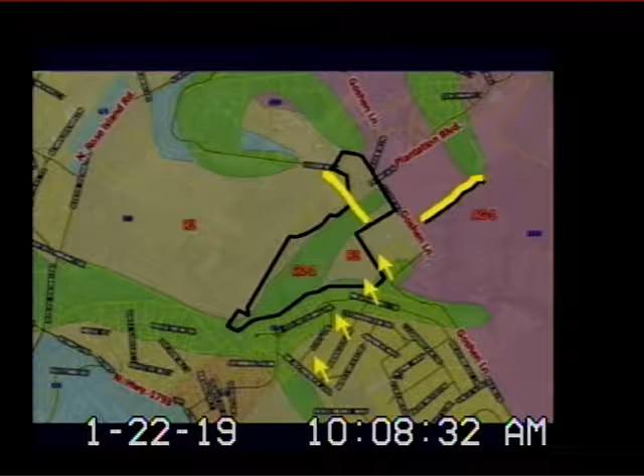This gives a closer view showing where the zoning is, the CO1 and the R2. If you touch the lower right corner it erases the arrows we put on — thank you, that's not exactly my skill set.

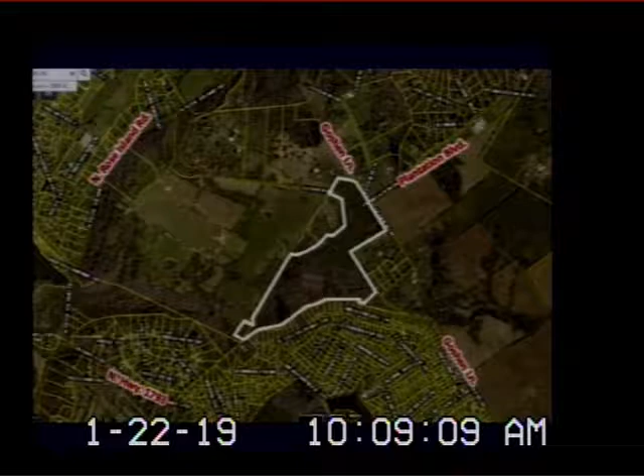This shows the aerial of our site. As you can see, a lot of the people who will complain about us removing trees ignore that we're retaining over 50% — 57% will be protected in this plan as the open space subdivision. Notice everyone around it has had their trees removed almost entirely. We're preserving more trees than anyone in the immediate vicinity, and more than anyone you'll see in opposition today.

This is an aerial with our plan on top, alongside the original plan we showed at our first neighborhood meeting. The change in the second plan is subtle — you'll see an open space area in the middle, with basically two cul-de-sacs in the original plan. In the new plan, there's an additional cul-de-sac, with the open space area and common grounds in the center moved a bit further into the neighborhood.

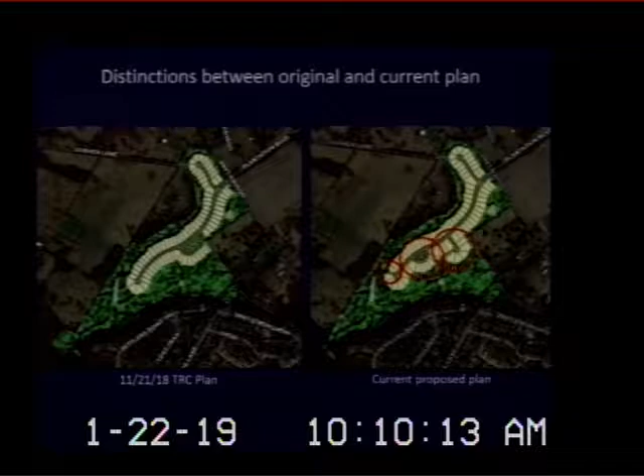This shows the two plans side by side with the areas of difference circled. The changes didn't alter the substance of the neighborhood much; they allowed us to give more buffering to the neighbors immediately adjacent to us. At the neighborhood meetings, many of those neighbors wanted more buffers, and we listened. We're required to provide buffers, but we've provided very good ones, and I'll give details as I go through the presentation. That was the reason for the layout change.

Now, the open space subdivision — these are the objectives laid out in your code, which provides a design alternative to conventional subdivisions. It's meant to provide flexibility in developing areas with environmental constraints, scenic vistas, passive recreational resources, and valuable agricultural resources. This site has environmental features we want to preserve — slopes, and areas with streams or ephemeral streams — and we're keeping those in protected areas.

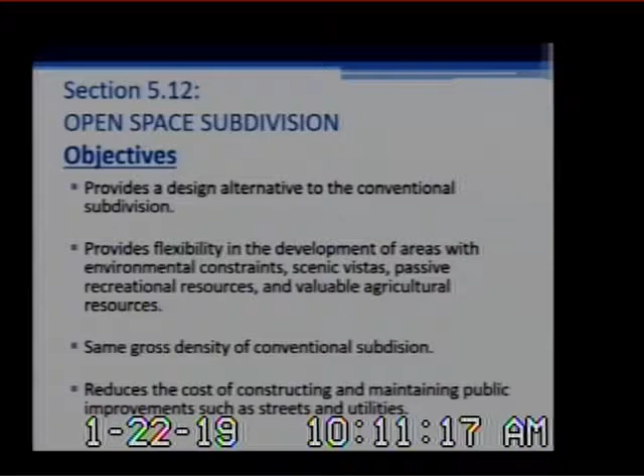It has to maintain the same gross density as a conventional subdivision — you heard Ms. Alvey confirm we meet that. It also reduces the cost of constructing and maintaining public improvements like streets and utilities. By having lots closer together, you need less infrastructure — fewer pipes, less disturbance to the ground — so you can preserve more. That's the intent of the open space subdivision. Now, these are the design principles, also found in your regulations.

It's to reduce individual lot size. So how do you reduce them? You've got to preserve at least 50%, and with what land you have left, you can make the size of the lots. But can you make them any size you want? No, you cannot. Your regs are very specific, because despite the fact that we can reduce the size, we still have setback standards, front yard and backyard standards, so there's a limit to how small we can get. All the lots on the CO1 comply with all of the standards set for CO1. All the lots in R2 comply with all of the setback and yard requirements for R2. That's how you get the size of your lots.

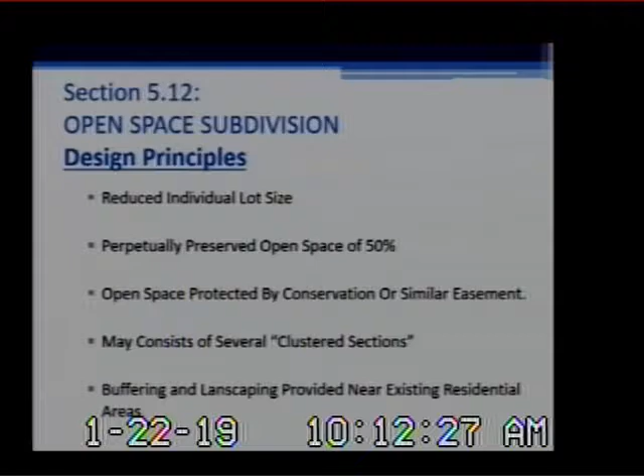The open space is protected by conservation or similar easement. That'll be on our plan. It may consist of several clustered sections - we have four sections of this neighborhood. The buffering and landscaping provided, I mentioned that briefly, and I'll give a little more detail as we go through that.

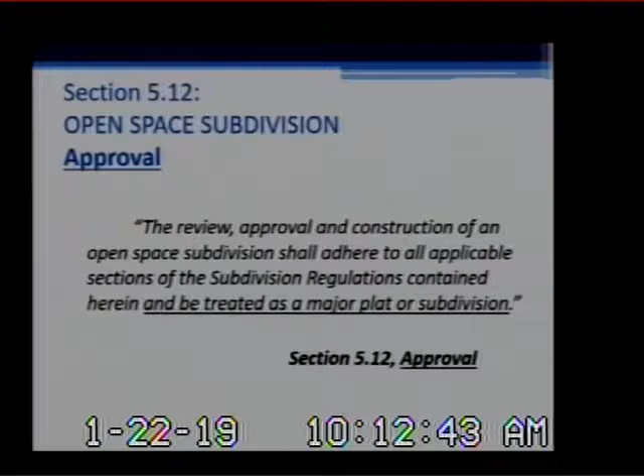For the approval of an open space, it's clear that the subdivision approval is exactly the same as it is for a normal subdivision - no different, standards are the same. We are still looking at a ministerial decision, not a discretionary one. The legal test is the case Snyder versus Owensboro - I won't read that, I think most of you are familiar with it. But this case is very clear that standards have to be set, and we meet those standards. If we do, we get approved. That is what the law says for a preliminary subdivision plan.

Now let's get into the nuts and bolts of our plan. Total acres, I already mentioned, is 78.83 acres. The CO1 acres consist of 38.83 and the R2 is 40, roughly 50-50 on both of those.

The developed coverage is the part that we will develop with roads and lots. Mind you, even with these lots, we are not cutting down every tree on every lot - they are not going to be clear cut. The backs of most of the lots, particularly those close to adjacent property owners, those trees will be preserved. The question was fair - could an owner cut those down? Yeah, they could. Will they likely cut them down? Probably not. It would be very expensive, and most of the time those neighbors want to have a buffer just as much as the people that currently live there now.

The open space acreage is 45 acres. One of the things I've read in many of the criticizing letters is on the environmental side, and there's a lot of things that are subjective in terms of design - beauty's in the eye of the beholder. But in terms of environmental, even though it's not required beyond protecting the open space, we go way over and above what's required to protect the sensitive features on this property, and we protect them well. The open space requirement was 39, we're going 45, significantly over that, and that comes directly from your regulations, Section 5.12A, Design Principle.

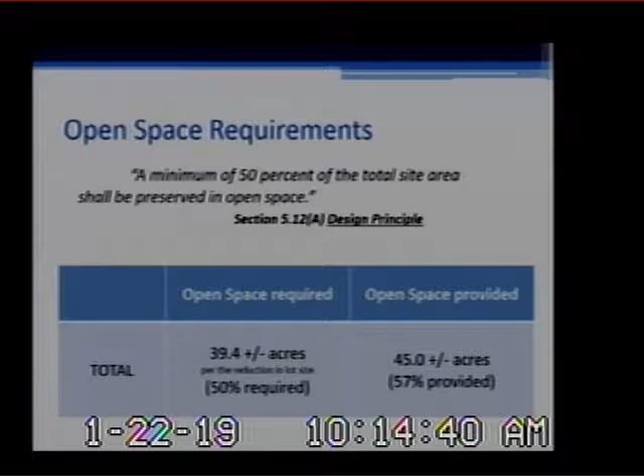The same maximum density is allowed in a conventional subdivision - this is what your regs say. An open space subdivision has the same gross density of a conventional subdivision, Section 5.12 objectives. Now, there was a question, I believe from Commissioner Douglas, asking whether we provided a lot yield plan. We had not, because we didn't think it was necessary - we believe we comply under the gross density. You'll have two ways to calculate density.

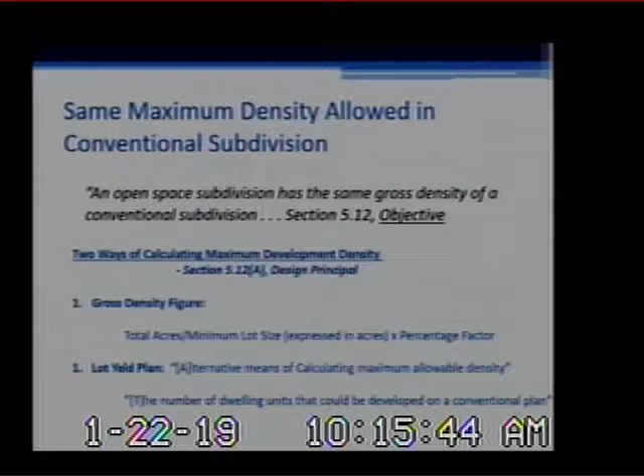One is the gross density figure, and the other is the lot yield plan. In this presentation we'll provide both and give you the numbers for both. We comply with both, but let me back up on the lot yield plan. The gross density is just a mathematical calculation - take 60% of what you could possibly feasibly fit in. Let me explain that: once you put in roads, usually your density isn't quite as high because of the roads. This allows you to pretend there are no roads, so you could go maximum. The lot yield plan actually requires you to look and map it out - how many could you actually functionally put on the property? Under the calculations for the max lots under gross density, Amy said 110.

I think it's 112, but it's not really a substantively different number either way. Under the lot yield plan, you can go to 98 lots. How many lots are we proposing? 80. We aren't even close to touching the maximum development density for this piece of property.

Here's the lot yield plan. I won't spend much time on it, but you can see how it would be laid out. If you have any specific questions, we could bring Derek Triplett from Land Design and Development to answer them. But basically, it's in the record, and you can get 98 lots under a lot yield plan.

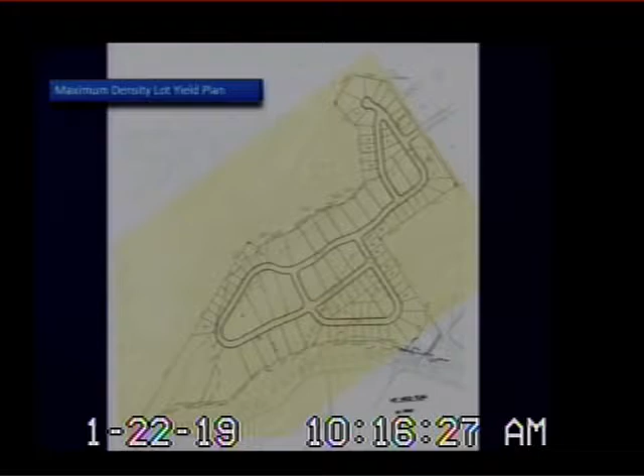Here's our development. The red lines, which hopefully you all can see, show the division of the sections. The sections are important, and we'll build generally in those types of phases, one section at a time, and that's the way the development will be brought out.

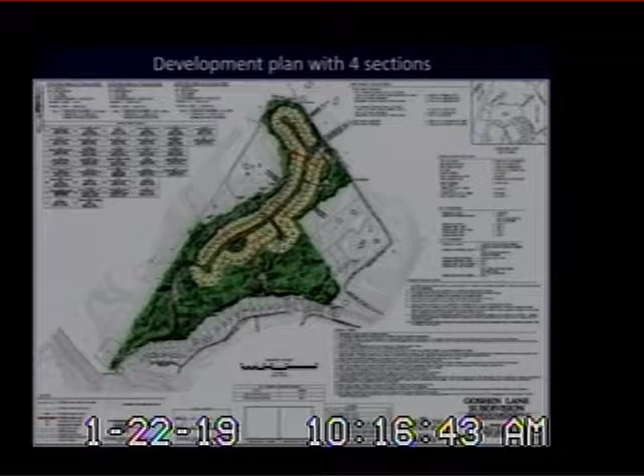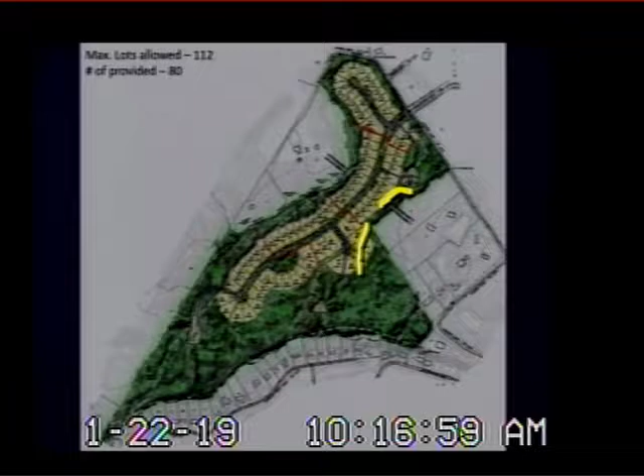This is a close-up of that. Again, I've got max lots allowed at 112. I don't have the lot yield on there, but those things both go hand in hand, and again, we're underneath both. Now, the two areas on the buffer in this area, and then obviously under road as well - that's where the buffering is going to be, and we'll get to those slides here.

This shows the property. I'm getting my north and south a little mixed up, but I think you can see on one side we provide a minimum of 30 feet - that would be to the north - and then to the southeast, if I've got my bearings correct, we've got a minimum of 40 feet. Again, that 40 feet does not include the lots - the lots will probably have an additional 20 feet of trees left on them, maybe even more, but probably at least 20. So those buffers will be greater than what's actually displayed.

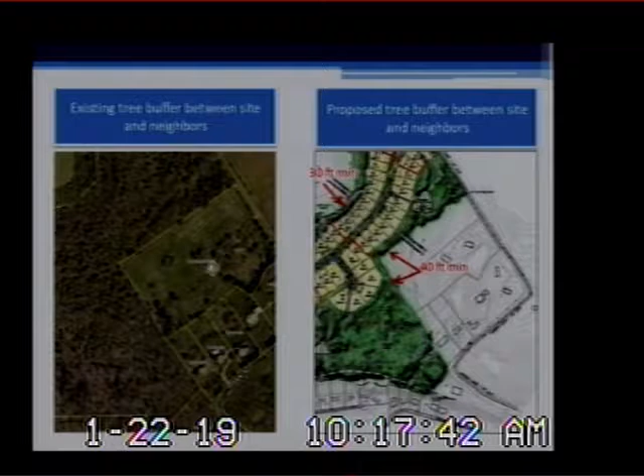The other side of it is along Goshen Lane, on the part where it wraps around. On the part that kind of looks like it has the two angled sides at the top of the screen, the minimum is 30 feet. Now, on the other side along the straight section of Goshen, it's 20 and 50. The buffer is technically 20, but with the right-of-way, the actual tree coverage will be more like 50 feet. So that's what that figure is, and we're not going to cut or clear those trees down. We are leaving those trees, so they will not be cleared.

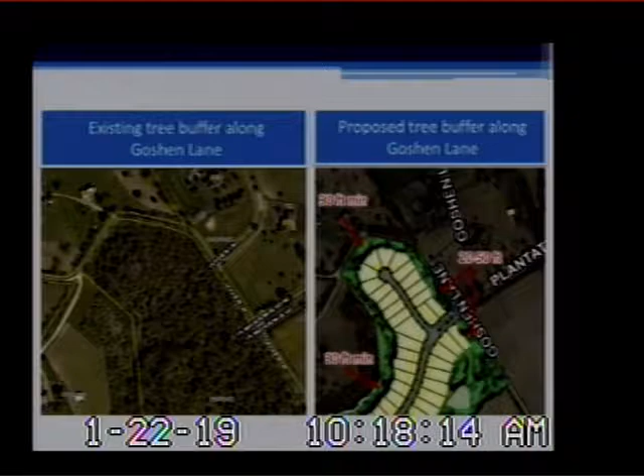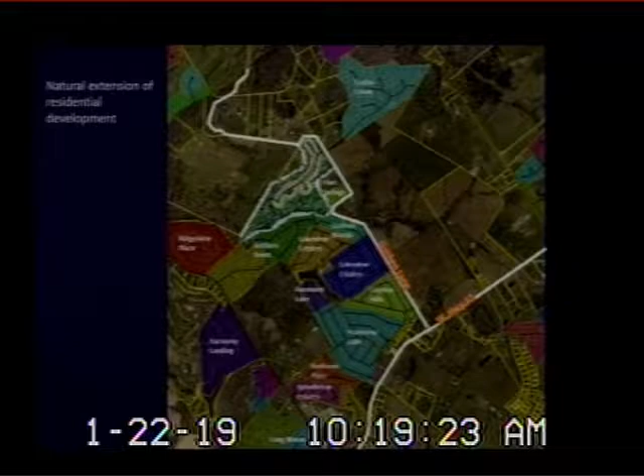Oldham County is going to have development. It's going to happen. Where do you want it to happen? Would you rather have it in a place where there's no other development, no infrastructure for that? No, of course not. This is a natural progression of this neighborhood, and this is where we put it. Taylor Creek, a little bit beyond us, honestly, if anything's out of place, Taylor Creek is out of place. It's by itself and was put in a long time ago. We are not repeating the mistake of putting a neighborhood where there's no other development - we're keeping it immediately adjacent to development that's currently there.

Another thing I saw in some of the neighborhood meetings and in the letters were comments that Goshen only has, I forget the exact number, 900 residents, and this neighborhood's going to increase it by 25%. I don't even understand some of these comments, honestly, because we're not even in the city of Goshen. You can see in red where the city of Goshen is. I don't know if people are confused or just don't understand, but we are not in the city of Goshen. Now, what I think is important, and maybe this is the point, is how many people are in this area.

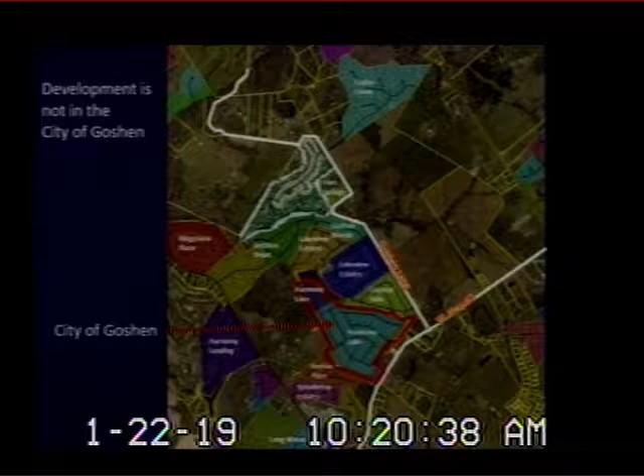If you look in that general area, there are over 1,000 lots. This is exactly where additional development belongs. And we are adding a modest number of only 80 lots. We are the only one preserving environmental areas, preserving open space for the deer, the bunny rabbits, the birds, the trees. Where we do have to clear it for some lots, time will bring trees back. People like trees and generally want them to stay. But this subdivision belongs in this area, and it's a good development for this area.

This is a comparison to Cedar Point. Commissioner McWilliams, I watched the Cedar Point hearing. Some of the same issues came up here in terms of road improvements, and I was impressed with a lot of the questions you asked at that hearing. I want to make a comparison because that's a subdivision your commission approved with a zoning change, when you had discretion, not in this type of case.

The number of lots in that development was more than ours, 25% more, 102 lots. We're at 80. Their total acreage was 32.7 acres; we're almost 80 acres. More acres, less lots. The open space, they had 6 acres. We have 45.

Price point's roughly the same. Their testimony was 300 to 500. Ours is going to be 350 to 500. It's hard to give a definitive number because it comes down to building costs, which are going to be more than a year away. In addition, we don't know what amenities people will ask for.

Road type, Commissioner McWilliams, this was the issue in that case—that Cedar Creek is a quote-unquote 'collector road.' That's a classification referred to as the functional classification from 2010. From the best I could understand, that's never been adopted by fiscal court. It was adopted by the Planning Commission, but never by fiscal court. It's also not named in the subdivision regulations, so I don't think it even applies.

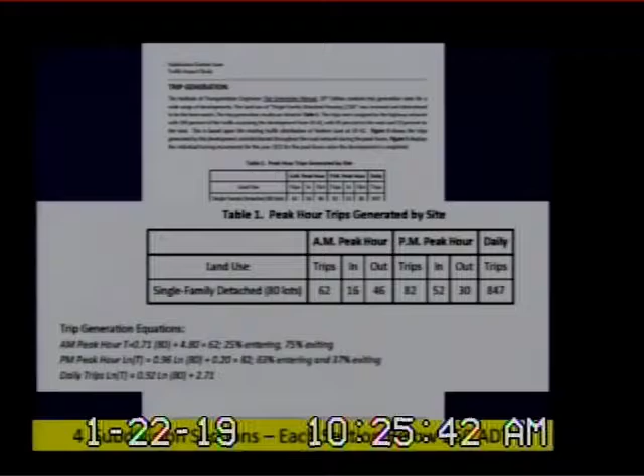The results of the traffic impact study are that the intersection at US 42 and Goshen Lane will operate at level of service A on US 42. The southbound approach, Goshen Lane approaching US 42, will operate at level of service C and B in the PM peak hour, and all the other intersections will continue to operate at level of service A and B. I do want to point out that the approach coming out of the Goshen store currently operates at level of service D and will go to level of service E in the future.

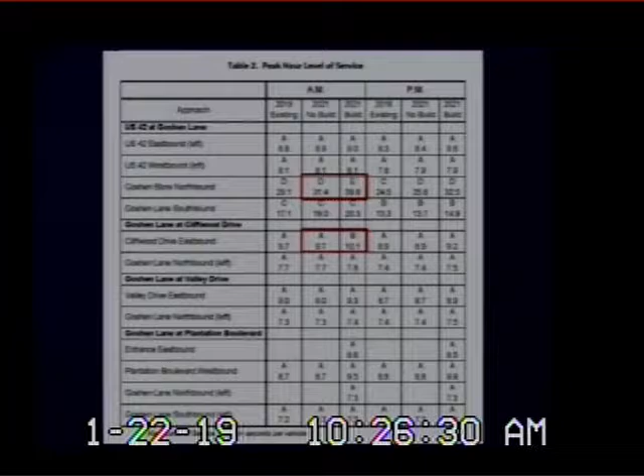This is partially due to the small number of trips on this side of the road, and it is not significant in evaluating the capacity of Goshen Lane specifically. The only other location that changes in level of service is Goshen Lane at Cliffwood. Therefore, the conclusion is that there would be minimal impact to the existing highway network. No capacity deficiencies were identified during the study, and therefore no improvements are required or recommended to provide additional capacity.

I want to go back to the US 42 left turn lane warrants—we had this conversation in July on another case—that the Kentucky Transportation Cabinet guidelines for improving intersections are based on the need to provide additional capacity. The fact that this intersection is operating at level of service A and C would not make it a candidate for improvements in the future.

Diane, I just have a couple of questions going back to the level of service. But if you could get a little closer to the microphone. Sure, thank you very much.

Diane, on the level of service, there's two in red. Those are the only two intersections that are changed at all as a result of this development, is that correct? That is correct. And the only one that drops below level of service C is the Goshen store northbound, correct? That is correct. And you mentioned that's not significant—can you explain in detail why that is not a significant intersection?

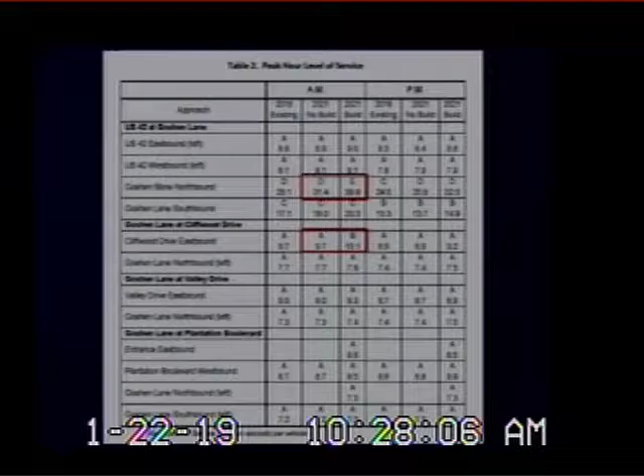This movement is not significant because of the land use that it's serving and the amount of traffic trying to exit. In the PM peak specifically—I have the number, I can look up the AM—but it was 11 cars exiting. So 11 cars are going to spend an average of 30 seconds. To me, that's not significant. If it was 200 cars waiting 30 seconds, that we're starting to discuss something significant, but 11 vehicles exiting makes it less significant.

Thank you. Just to add one more comment on that: it's not that if you had more cars it's a low rating—it's a low rating because you have so few cars. If one car has to sit there a long time, but you had 10 cars behind them that all got through the intersection, the average would drop well below a C. It's high on the level of service because you don't have any cars going through there effectively. 11 cars during rush hour—it's just not a significant intersection to be considered.

We've got A, and I'm going to go through these improvements. A is actually closer to our development entrance. C is closer to US 42. Perhaps I should have done it in the other order, but that's the order we have.

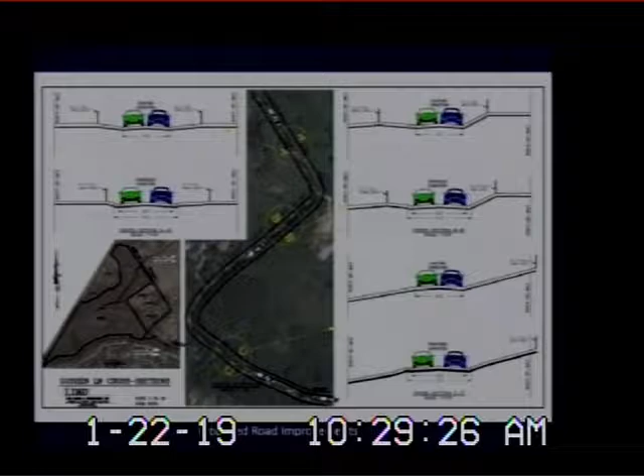This shows number A, the one in front of our entrance. The top of that red line is Plantation Boulevard, and that goes to the first turn. It'll be 18 feet with curb and gutter, effectively 21 feet the entire length. Currently it's roughly, and it varies in areas, about 15 and a half feet in that stretch.

When you get beyond that Plantation Boulevard, it gets even smaller - down to 13 feet. It might even get to 10 or 9 feet, depending on how far down the road you go.

One of the things you talked about in the Cedar Point case was not wanting hourglass shapes to the road, where it cinches in at areas and gets wider at others, because it's a traffic and safety hazard. There's no question this would be a big safety hazard, since there's no obligation for us to improve the road all the way down to Rose Island Road past our development. If you have 18-foot roads with curb and gutter, or 20-foot roads, and then cinch down to 13 feet, that would encourage speed, and people who don't know the road would catch it unexpectedly. That's not what you want. You made a finding in that other case last year specifically not to do that, and we'd suggest you follow that same rationale here.

This is between the two sharp turns, about 15.7 feet. Part of it gets a little wider around the first turn, but it does cinch down pretty good. In addition to not wanting to make it too wide because you increase speed, it's our opinion you really don't want to increase speed in this area on this road at all. You want to keep a modest speed.

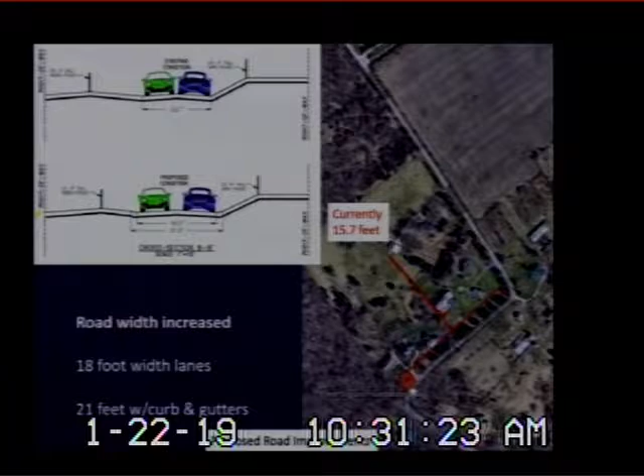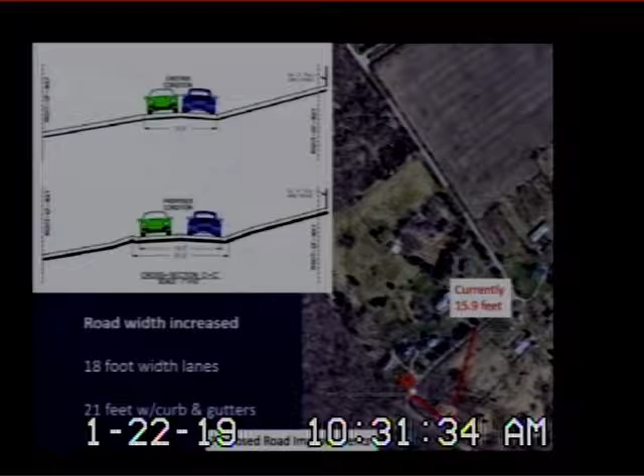This is the additional part going towards Valley Drive. Your engineer said to make improvements all the way to Valley Drive. Valley Drive is already 18 feet plus curb and gutter effectively to where this map starts. So what I'd suggest is we're at 18 feet - if it's already built out, we don't have to increase it. What we're trying to do is match the improvements the county made up to this point, keeping the road at the same distance it is currently. We will put that into a binding element as well.

Just so the people behind me understand - some are not lawyers or council people - binding elements, as you all know, are like deed restrictions. They run with the land, but unlike a deed restriction, they're enforceable with the government. People can come to you all and to the regulators to get them to enforce the regulations if we put it into our binding elements.

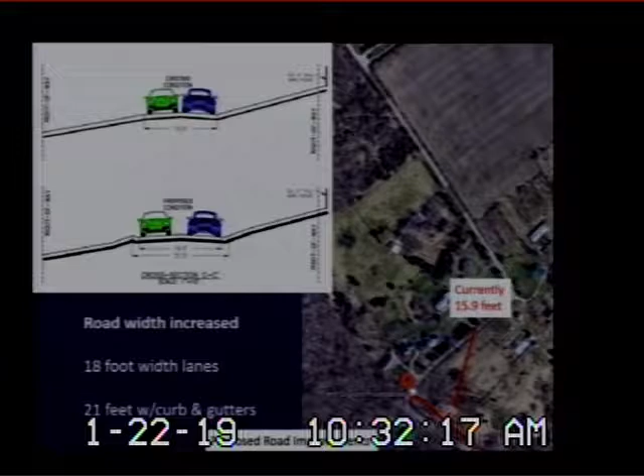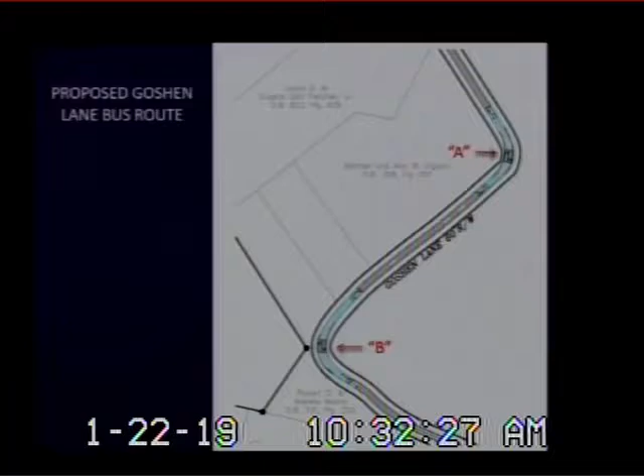It's even more powerful. This is the two curves, in addition to making the general road 18 feet plus curb and gutter. These are the curves, and there's lots of question about what to do about those. Right now you have bus traffic using it, navigating all of these turns, and you heard testimony that there haven't been any issues with that.

With our road improvements at the first turn - this one is further away, closer to our entrance, further from 42 - the width would go to about 31 feet. What you see on that drawing is two buses can get by each other within their own lanes with the width we'd be proposing. I don't think you want to go much larger than that, and honestly, I don't think you want to bank the road or the turns.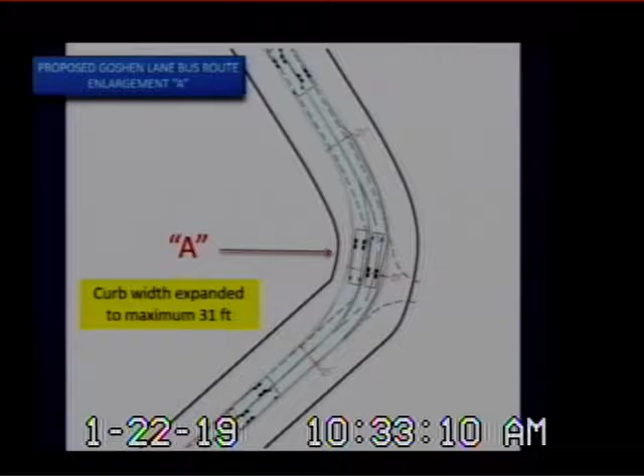All you're going to do is unnecessarily increase speed, and nobody really wants that. What you do want is people to have safe passage, and the buses being able to do that means cars could do that even easier.

This is the other intersection, the one closer to the curve near 42. This is down by the lodge. If you're familiar with that home, it's the one with the neat-looking house, looks like a lodge, with the balcony that goes all the way around it.

That would be 30 feet. So to the extent we're at 18 feet, as you come off these curves, we'll actually be beyond that until we cinch down at a safe level.

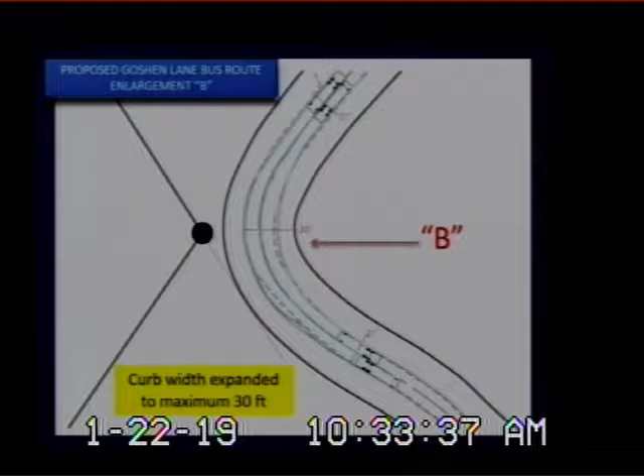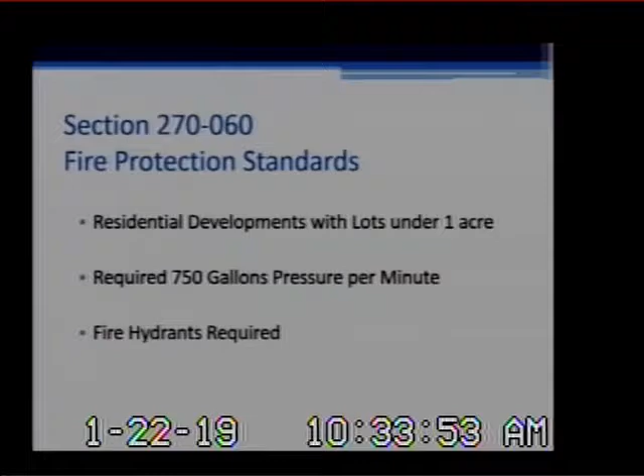The other thing is fire protection, water capacity, water pressure. Your code, section 270-060, says residential developments with lots under 1 acre are required to have 750 gallons per minute of pressure. Fire hydrants are also required. That's what your code says. Right now, you all don't have that.

Why is water pressure important? Of course it's important for people watering the lawn or taking a shower, but more importantly, it's important for fire prevention. Right now it's inadequate, it's 450 to 500 gallons per minute. That is the water pressure now.

Anybody that's honestly interested in safety should want this development to take place. We will put an 8-inch grid tie-in with the Louisville Water Company. We agree to put that in a binding element, and that will increase flows to a minimum of 750, perhaps up to 800 gallons per minute.

So we're going to easily improve safety for fire prevention. Additionally, our roads being improved doesn't just make it easier for buses to get back and forth, it makes it better for fire trucks and ambulances to get through there. All of those things, if anybody looks at the road the way it is now, could be a problem today.

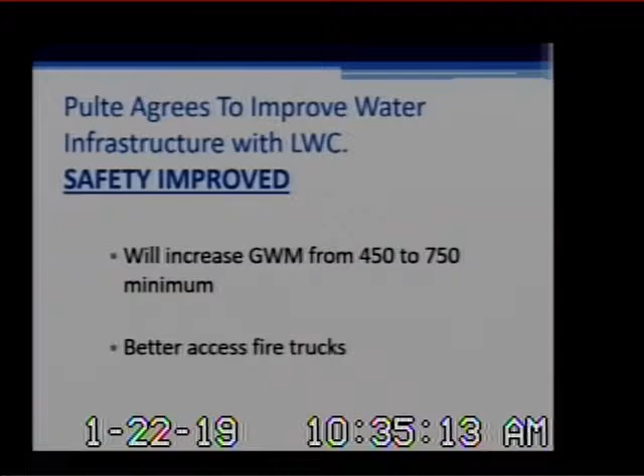School capacity standards, this is another one of the boxes we've got to check. It was recently reformulated. The Oldham County School Board adopted the campus capacity worksheet. It's reviewed annually, so I believe it was just reviewed again for accuracy and relevancy. It averages the combined school capacity serving the campus and applies the multipliers.

Now, some people may say you can look at things different ways. If we came in as applicants and didn't satisfy your capacity standards, but said you should just look at your capacity standards a different way to qualify, if you adjust how you look at it, that wouldn't be fair for us to do, and it's not fair for others to do to us. The rules are the rules, put in by fiscal court, adopted by you all, and we are following them.

At the TRC and today, based on 80 lots, we net 38 students under the calculations. Those would attend Harmony, North Oldham Middle School, and North Oldham High School. The capacity with the build is 94.12%, and that allows us 35 building permits per year. We can't build out all 80 the first year, but we should be able, under the mathematical calculations, to build out 35.

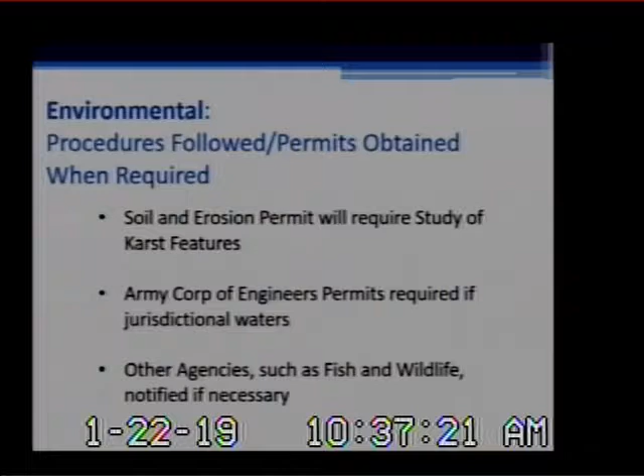Not sure how to get that on the floor, but he's here to answer any questions. Amy, would you turn that on if you get a minute?

If there are any other agencies such as Fish and Wildlife that are required, we will follow them. I don't think those are required, but if they are, we will follow them. Sewer capacity, this is not my area.

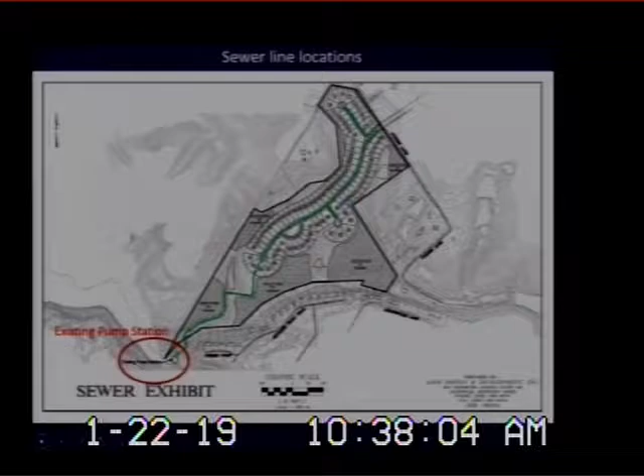Currently, this is our site. The greens are where we're proposing to build sanitary sewers. All these sewers will be gravity, flowing to the Pebble Point pump station, as you see on the lower left-hand side. As Kevin Gibson explained, there is capacity at that pump station, as well as the treatment plant that pump station is pumping to.

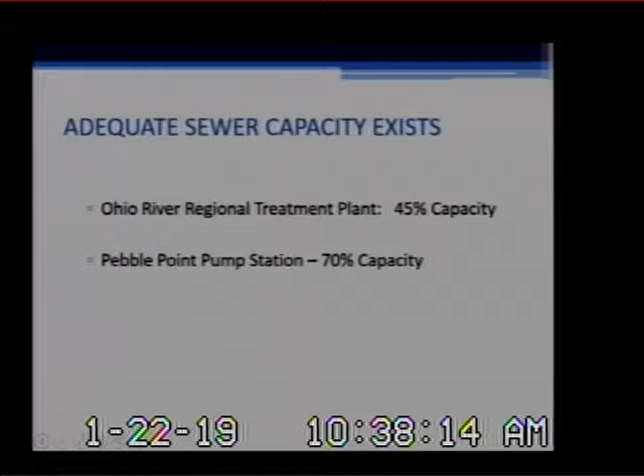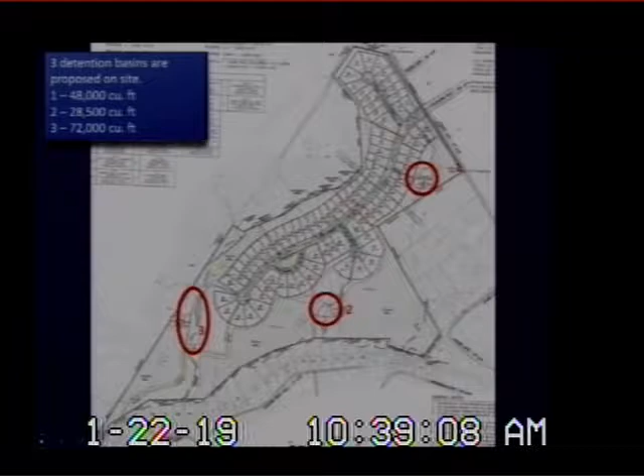Again, there's been concern about the drainage in Goshen Lane at the entrance. We've agreed to go ahead and analyze that and figure out what we need to do to improve it as well.

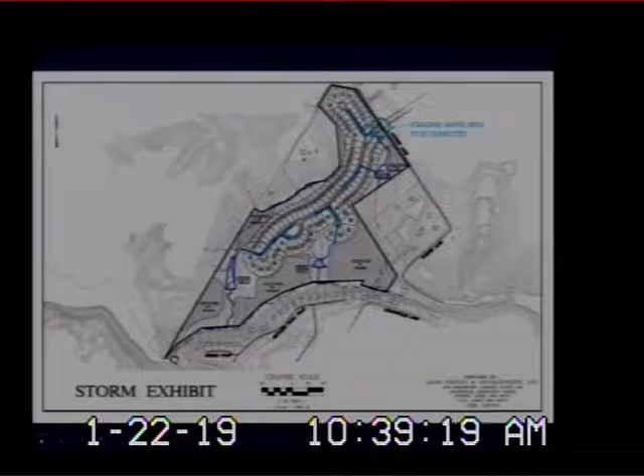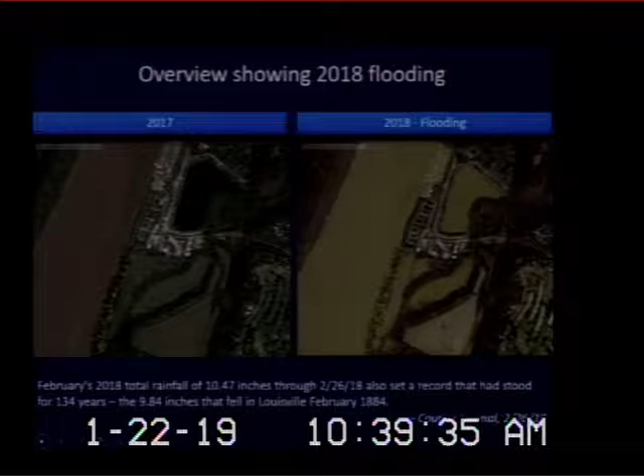These are some aerial views from Google Earth of the Rivers Landing Lake. I know there's been concerns about flooding in this lake. On the left, from 2017, this is your normal situation. In 2018, this is during the February flooding. You can see, zoom in here, it looks like the Ohio River is basically the same level as the Rivers Landing Lake. So what I believe is happening is the outlet for this lake—does it work?

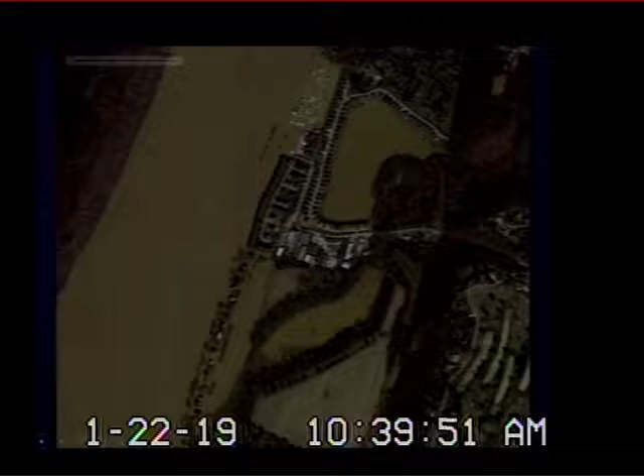Yeah, right there. These creeks, these ditches, and everything is backing up from the Ohio River, and it's backing up into this lake. Instead of the water being able to get out of Rivers Landing, it's actually backing up into the lake. So it's not actually the drainage coming from underneath Rose Island Road causing this issue—it's the Ohio River backing up, forcing it back into the lake.

That's not true. Sir, we'll have an opportunity to hear from y'all later.

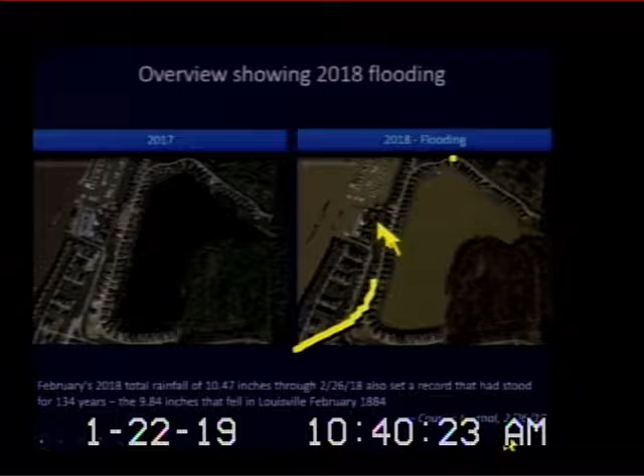Again, a little zoomed in of that area, the Rivers Landing Lake. You can see, it looks like everything's probably right at the same elevation as the Ohio River.

Thank you, Eric. Just to follow up: to the extent we will drain into the Rivers Landing Lake, and to the extent that lake has had any issues with water, we are a small contributor under any way you look at it—34 acres out of a watershed of over 1,000. A very small contributor to that.

We cannot control when there is a record rainfall in our community of Louisville that breaks records over 100 years old—that's what happened in February of this year. When that happens, it's not just Rivers Landing Lake that's going to have problems, it's areas all over our city, particularly ones by the river. We can't control that, but we can emphasize to you all that we are not the ones creating those issues. Those are issues the infrastructure has to deal with, but they're not caused by this development. This development is insignificant in the big realm of things.

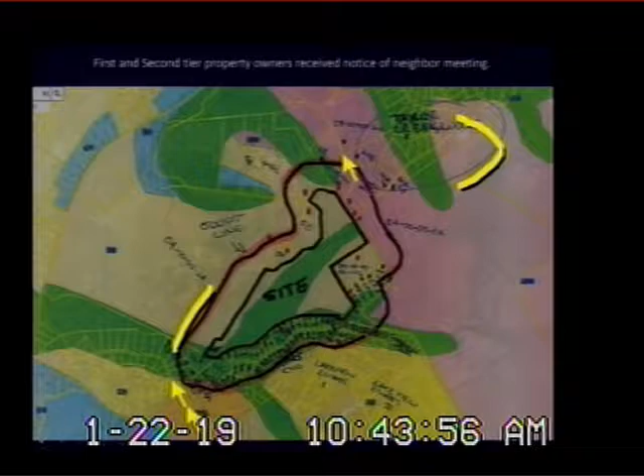You can see up here we invited some of the people from Taylor's Creek. While we didn't send a letter to every single resident in there, we did send it to the head of the neighborhood association, so trust me, they were all aware of it. And around here, particularly when you get around Settlers Point, we went well beyond where we're supposed to go and where we're required to go.

So we more than covered what's required. As for the traffic study, you heard Ms. Wall tell you we're not required to have one, but we did it before we filed - we started to do it. Now, one of the letters in opposition said we were changing the study. The study was getting updated, it was a work in progress, but we provided the very first meeting the information we had, and to the extent there were any changes, none of it changed significantly or materially. It changed slightly on the fringes, but the overall message and conclusions did not change at all.

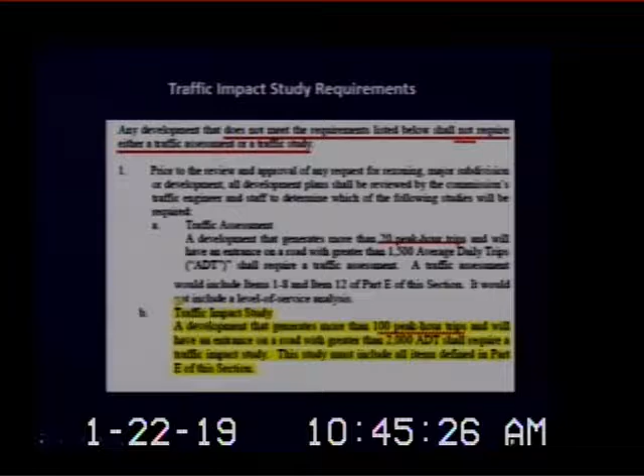This shows the traffic impact study requirement in your code. It says a study will not be required if you only have 20 peak hour trips and/or 1,500 average daily trips. You saw from Ms. Wall we're at 847 daily trips - if you include what's already there, you're still under 1,500. We were not required to have a traffic study. A traffic study is required over 100 peak hour trips - we're below that number - or greater than 2,000 ADT - we're below that number as well.

I think we've prepared a very good plan. I think it's appropriate for this area. I think the number of lots is a reasonable number, done in a careful and environmentally sensitive way. If you remember from the lot yield plan, if we did a plan under those scenarios the clearing would be much more significant. Open space subdivisions preserve this type of property. It belongs in this type of area. It's the next step on the progression going down Goshen Avenue, or Goshen Drive. And that's all my presentation. Thank you all very much.

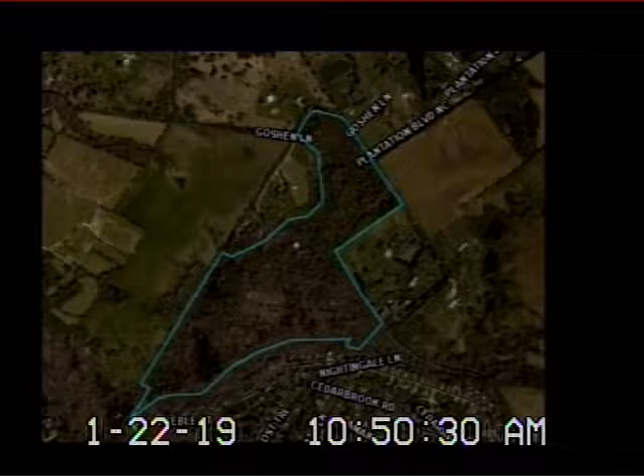I won't go into detail, but these are largely 1-acre lots. This is just a few photos. I think this is actually on the site. This is Little Huckleberry Creek, and it's basically 1-acre lots or larger. It's very agricultural, consistent with the land use plan for the Oldham County Comprehensive Plan.

So you've also seen this map. Basically, about half of this property is zoned CO1, conservation, and half of the property is zoned R2. The developer is using an open space provision of the subdivision regulations that allows you to enhance the number of lots you can put on a site to 120%.

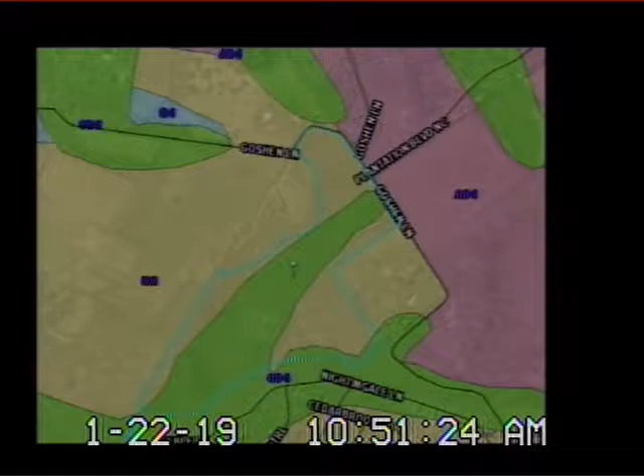We basically think that the intent of conservation zoning is to protect significant natural features, wooded areas, and water courses. It's to minimize erosion of soil and siltation and pollution of streams and lakes, and it requires a minimum lot area of 1 acre. There are no exceptions in the zoning ordinance for cluster zoning, open space zoning, or lot size averaging. To the extent that that's been put in place, our legal argument is that it needs to be an exception to CO1 zoning, because effectively what you're doing here is putting way more lots on this particular location than is appropriate for conservation zoning.

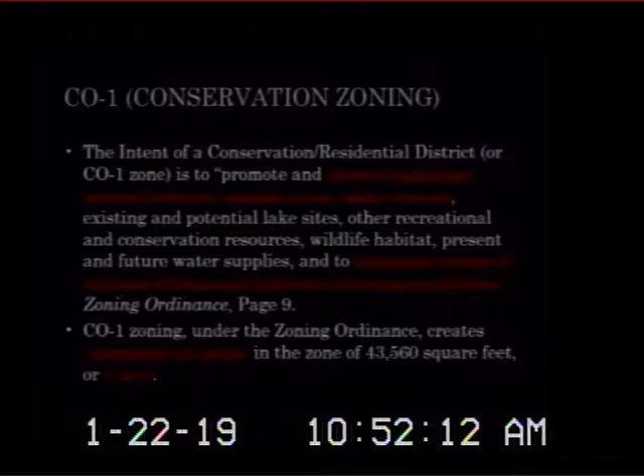If you look at the plan, you see some of the results of putting far too many lots and too small of lots on this location. Again, these folks are not NIMBYs. If this was a reasonable development with 1-acre lots, I think there would be some support. But particularly because you have so many lots and so much drainage, you have to put in 1, 2, 3 detention ponds. One of those detention ponds is in a jurisdictional stream for which the applicant will have to obtain Clean Water Act permits.

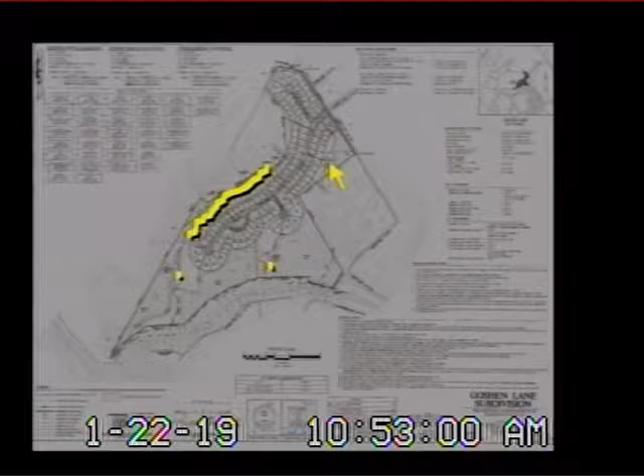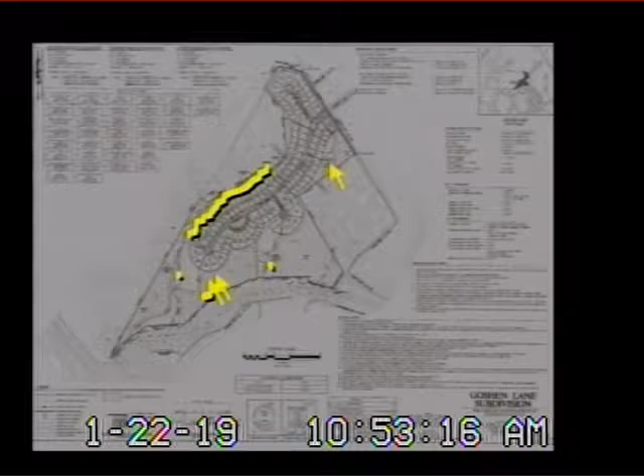If this were reasonable and smaller and consistent with CO1 zoning, then you wouldn't have to have all of this infrastructure in the streams. In addition, this sewer is going to have to have blasting to put it in place, which we feel is problematic. Essentially, this is the wrong development in the wrong place.

Now, the zoning ordinance basically, as I said, doesn't allow any exceptions. It says the minimum lot areas shall not be reduced, consistent with these regulations. There are no exceptions. And under Kentucky law, the zoning ordinance basically trumps the subdivision regulations.

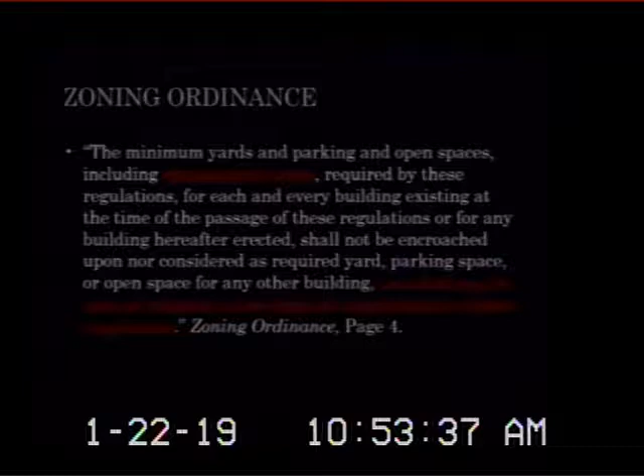So, from our perspective, if you don't provide the minimum lots of 1 acre for CO1 zoning in this particular section of this parcel, then you cannot meet the requirements of the zoning ordinance. So the applicant fails. In addition, the subdivision regulations relate back to the zoning ordinance, and the subdivision regulations say you have to follow the zoning ordinance.

An open space subdivision is not intended to allow development densities greater than what is allowed in a conventional subdivision, or to allow increased densities using land with marginal development potential. That's exactly what's happening here. What we're doing is saying, developer, you can basically create all this open space in areas that otherwise aren't developable. There's steep slopes, there's karst, there's jurisdictional streams. So those areas would never be developed in the first place. So we're giving them some incentive and not getting anything back.

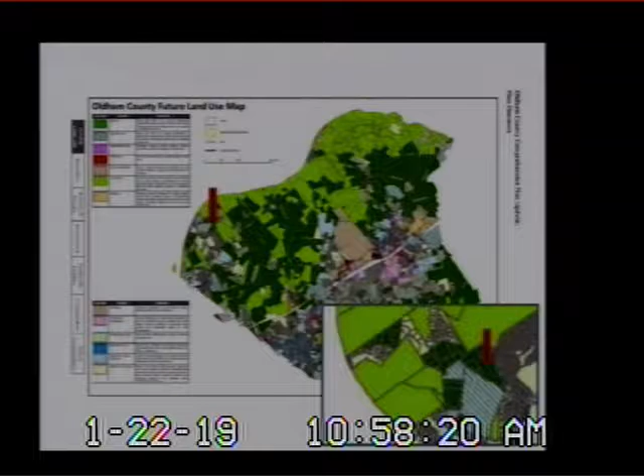Going back, the comp plan. This subdivision application is not consistent with the comp plan. This is the particular site, and it is basically a future land use of agricultural, which contemplates 1-acre lots. There are not 1-acre lots on this location.

In opposition, there are, as I said, 434 residents. There's 5 HOAs from Goshen Hills, Taylor Creek Woods, Rivers Landing, Trails Inn, and Longwood. And they have questions that need to be answered about traffic safety, about infrastructure, stormwater runoff and pollutants, karst, a whole host of other issues.

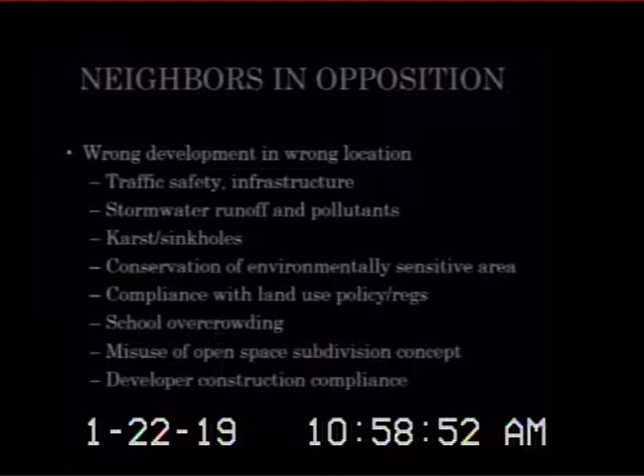School overcrowding, and developer construction compliance. You know, this is a very environmentally sensitive area, and this developer has been in Oldham County, and they've been cited. They've had stop work orders for failure to provide proper erosion control measures.

Adam Kirk, with Adam Kirk Engineering, 137 McClellan Springs Drive, Georgetown, Kentucky. Are you in? Yes. Okay. I'll speak up if you stand. Yes, sir.

Okay, so my name is Adam Kirk, again with Adam Kirk Engineering, and I was asked to review both the traffic impact study as well as look at the geometry of the roadway. When we look at the traffic impact study, we don't really have any issues with it. What the impact study did is it looked at the capacity of the roadway and the capacity of the intersection and said that there is adequate capacity essentially at the major intersections to get traffic through.

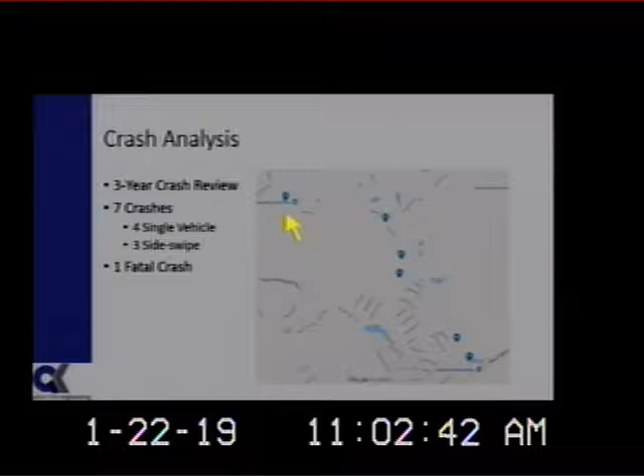So these are roadways that need to be addressed, and we're glad that the applicant is looking at that. However, we think that it doesn't necessarily go far enough. Number one, we mentioned sight distance, or stopping sight distance.

Stopping sight distance just says that when you're driving along a roadway, the minimum requirement is that you've got to be able to see far enough in front of you so that if there's an object in the roadway, another car coming at you, or a person walking, you have adequate time to stop. The speed limit on the roadway is 25 miles an hour, and it takes about 155 feet traveling 25 miles an hour to see something, react to it, and stop before hitting an object. The design speed for a collector roadway such as this, based on the subdivision regulations, is 35 miles an hour. At 35 miles an hour, you need 270 feet in order to stop.

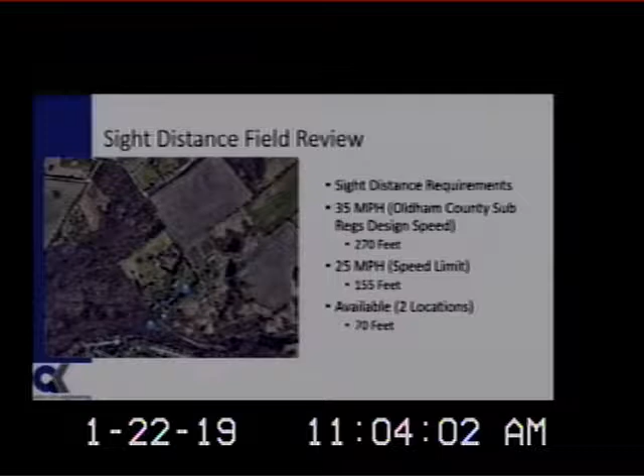At two locations along this roadway, we've got about 70 feet of stopping sight distance. At the S curve, at both of those 90-degree curves, because of the vegetation and geography around it, you cannot see more than 70 feet in front of you. That means if there's an object in the roadway, somebody walking, or a car coming at you, you cannot stop before you hit that object, that person, or that car. That is one of the significant safety problems we saw here.

Mr. Kirk, just to remind you that there's a lot of folks who want to speak. Yes, sir, and I'm going as fast as I can.

One last thing: Goshen Lane from Plantation Boulevard to Rose Island goes down to 11 feet or less, with the same sight distance restrictions, poor geometry, and vertical curvature we've discussed. It's also the site of the fatal crash. If you look at the traffic impact study, it did not say any traffic would be going out this way. But if we build 80 homes, there will undeniably be increased traffic on this section of roadway, and that should be improved as well. That's all I will say, and I'll turn it over to everyone else who has a chance to speak.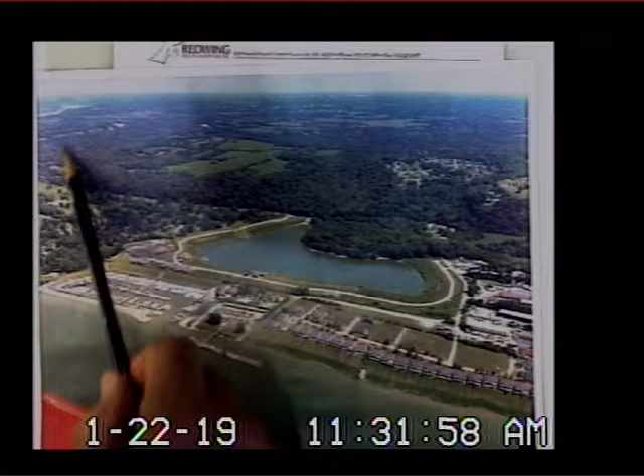Here's what the lake looks like at normal pool. Today, there are 59 homes around the lake. There are 31 that back up to the river on the other side of the lake, if you will. This is what the lake looks like at normal pool again. We hold the record in number of paddleboard people and canoe people and kayak people. This is what it looks like when it's flooded, and it's flooded a great deal of the time.

I heard earlier that there's not going to be any impact from the stormwater runoff from this development. I don't believe it.

A couple more pictures. Here's a real beauty. This is an overview of the entire Rivers Landing area. By the way, there are 20 docks around the lake edge, and they're held in place by 18-foot stiff arms, so the docks float up and down. Water gets up real high, the stiff arms come up. The fear is that if they come up high enough, they pull out of the connection, which is into either the steel facing that's part of the seawall, or the cap that's part of the seawall. Think a sidewalk all the way around.

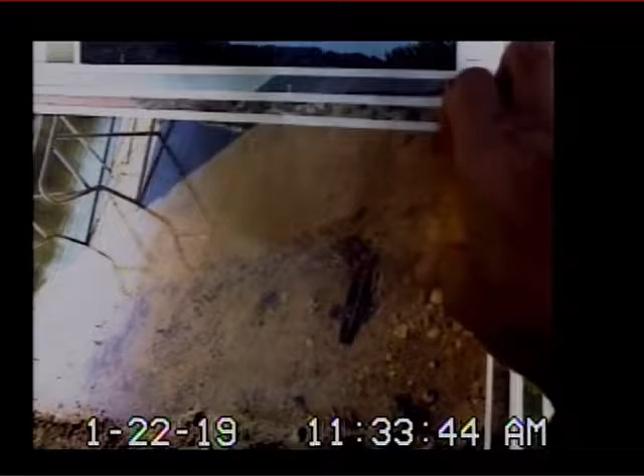We have problems with erosion. That comes with living by the lake, no problem about that. So you can see what's involved there. We cannot have increased flooding.

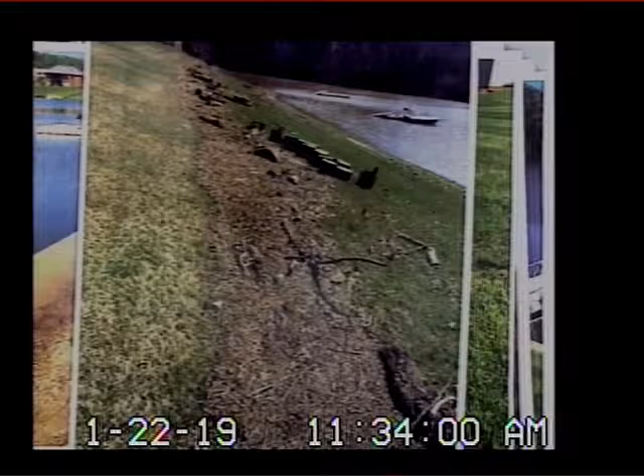Here's a little backbreaking work, cleaning up the debris that comes 2 or 3 times a year following floods. I will tell you this, that following a 2 to 3 inch rainfall over a period of maybe a couple of days, the surface level of the lake comes up as much as 6 to 7 inches, which backs up into the yards as you saw here.

So we're just really concerned about the volume of water that's going to come in from Little Huckleberry Creek, from Cardinal Harbor, and that's fueled by any additional runoff that's going to come down from this development. So I think that...

I want to make a respectful request of this group and of the folks that represent Pulte, that if flooding does occur and it can be attributed to this additional development, I'd like to hear, prior to a decision being made by this organization, what's going to be done to correct it. I think that should be part of, I'm not quite sure what the proper term would be, but that's something I would hope you all would require them to make. Not sure how to say that exactly. So thank you for your time. I appreciate being able to come and talk with you today.

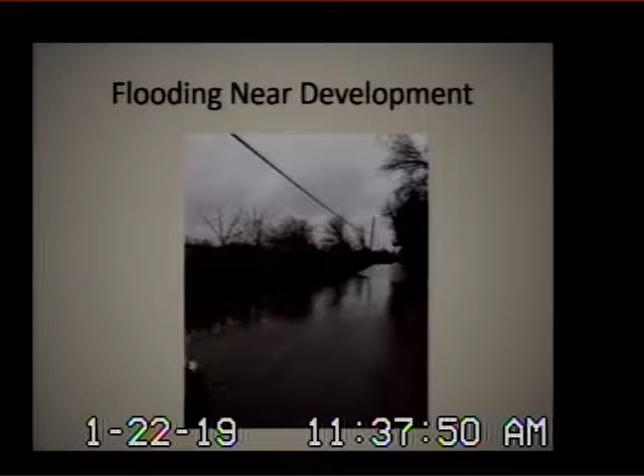That is runoff that actually comes from Goshen Crest Farm. Now let's go to the next slide. Here's a map, let's go to the big picture. This is the famous northern part of Goshen Lane. What you can see here, if I can draw it, we have a lake here that leads to a stream which then comes into my property. This stream drops and comes around, and this is the runoff, and this is how this collection looks in the summer. What I showed you is how it looks in the winter.

Again, whoops, I'm going backwards. If you look carefully, this is the Pulte development below us. This is the lake, and you can see there's runoff or streams that come directly from the proposed Pulte development area. I really, really need to know that this runoff that drops into that creek, which goes down the stream, which comes into my land, is going to remain clean.

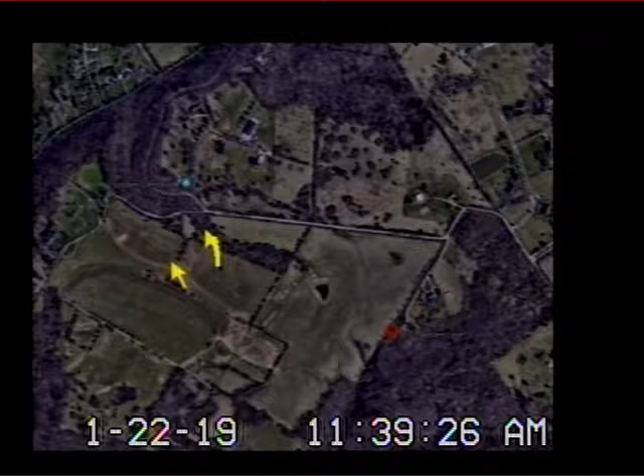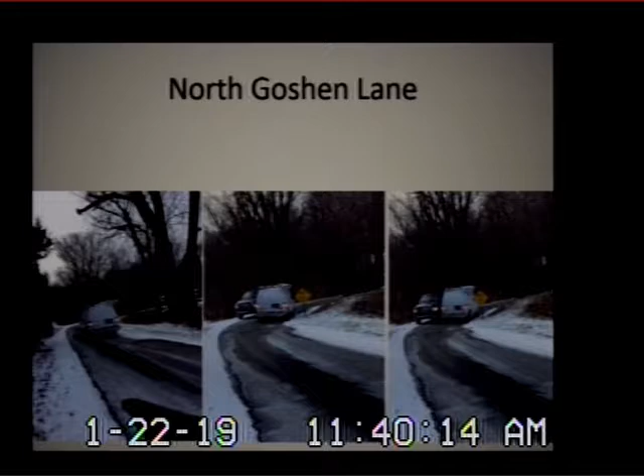And you can see here in front of our area, 2 trucks, both of them have to get off the road in order to pass. And Pulte was proposing to do nothing to remedy this problem.

Dr. LaRocca, are you about done? Yeah, right here, last slide. And this is the reason. We had a death earlier this year. I might remind, although they only go back 3 years, I'm told about 9 years ago, 2009-ish, there was another fatality higher up on Goshen Lane. That's too many deaths. The most important thing for me is the safety of my family and of my neighborhood.